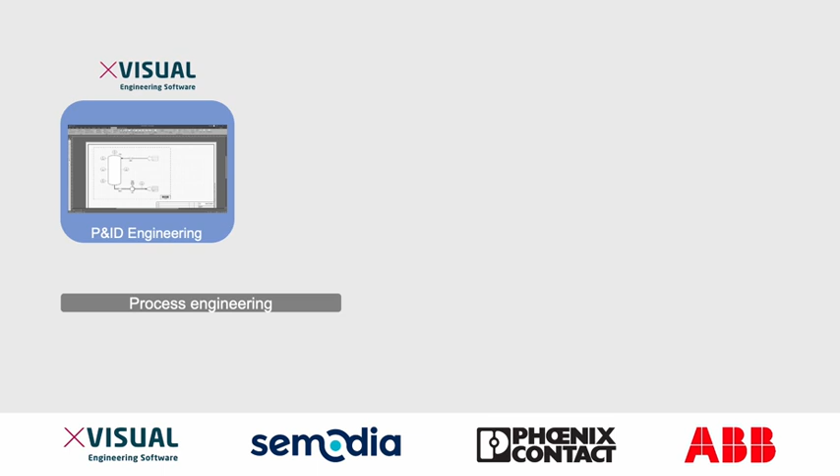The starting point is process engineering, which is handled in Plant Engineer from XVisual. The resulting P&ID serves as the basis for filling an MTP as much as possible from a process engineering standpoint. This MTP already includes a description of the operator display and important individual control functions. In this context, the MTP is exported via MTP Engine from Semodia, which is integrated directly into the P&ID engineering tool Plant Engineer as a software library.

The exported MTP is then imported into the MTP Designer tool from Phoenix Contact as part of module engineering. This provides the basic structures for implementing the automation engineering behavior, which are then fleshed out and specified further. The services are also implemented during this step. The MTP can be re-exported and transferred to the operator from the time at which the structural expansion is completed.

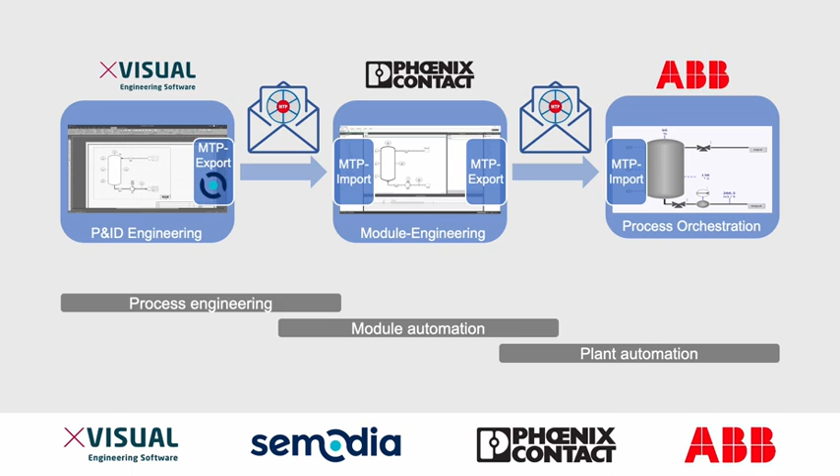This means the operator can already start integrating the MTP, while implementation of the behavior on the control level is completed in parallel. Integration is then completed in process orchestration from ABB, which allows direct controlling of the services and individual control levels. However, the best way to understand all of this is a real-life example, a dosing. Let's start with P&ID engineering.

Thank you very much for your introduction, Henry. Here we see the P&ID for our dosing module. The module has a container, an inlet and outlet with valves, a pump, and relevant sensors to measure various process values. Since the P&ID of a module is prepared in process engineering anyway, it's a good idea to use the P&ID information to create an MTP in order to reduce the workload.

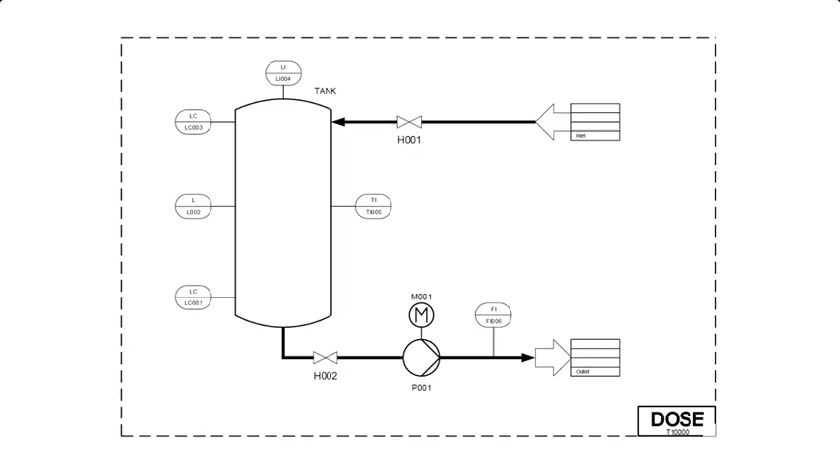Now, I would like to present the process for adjusting the P&ID and MTP export in Plant Engineer in more detail. Plant Engineer is a P&ID software based on Microsoft Visio, with a user interface that integrates seamlessly into the Visio interface. Here, we see the user interface of the software shown with our P&ID module.

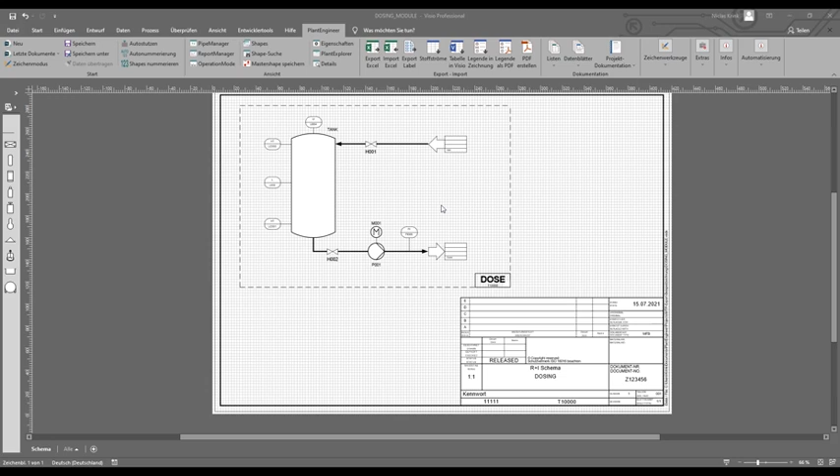However, the P&ID is not just a simple graphic drawing, but rather a representation of a complex informational model that describes the P&ID in the background, and which is supplemented by data that can be used to generate the MTP, for instance. In this module, there is still no sensor for measuring the temperature of the container, so I will now add one and specify it for the export. To do so, I will open the library icon in Plant Engineer and look for the icon I need to display the measurement. I will simply place it on the flow diagram via drag and drop.

Then I will select an intelligent connector tool, which I can use to insert a process connection line between the sensor and container. Next, Plant Engineer opens the Properties window. Here, I can now define the function number of the sensor and specify what kind of a measurement this is. In addition, I can specify whether the sensor should be shown in my MTP here.

First, I use a relevant characteristic to define that the sensor should be displayed visually in the operating screen of my MTP as a visual object. In addition, I assign an eCl@ss number for the sensor, which gives a standardized description of the type of sensor to be displayed. Furthermore, I can use the relevant characteristics to create communication attributes for the sensor so that the measured value can be read out in the POL environment.

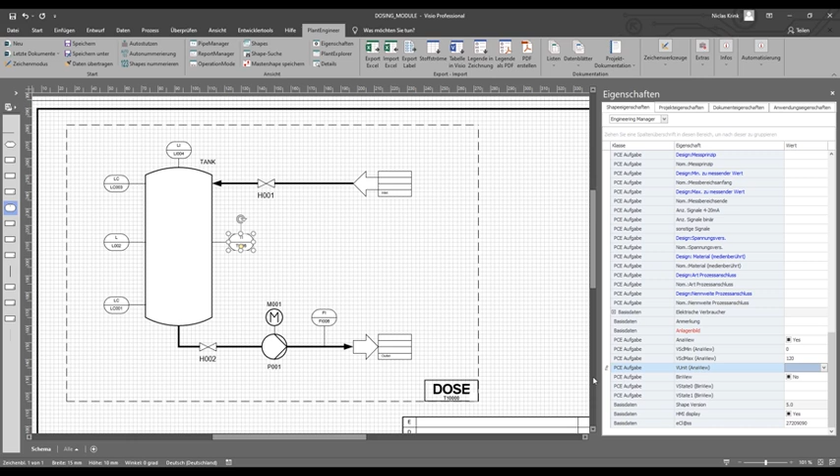In the case of the sensor, I define an ANAView attribute, short for analog view of the temperature. In addition, I define the scaling range, which is between 0 and 120 degrees in this example. This means that for each icon on the P&ID, I can define whether the icon should appear on the MTP operator display, and to what extent it should be able to be measured and controlled by the MTP. The limits of my operator display are defined by the dashed module frame.

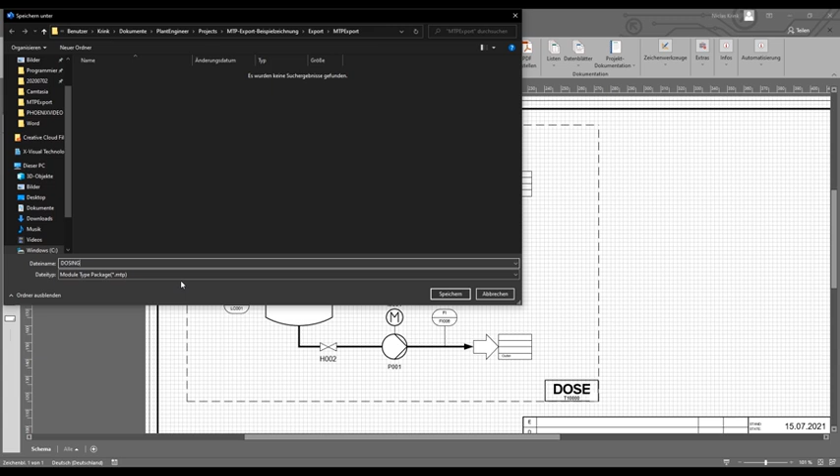I can easily initiate the export of the MTP via the user interface. To do so, I assign it a name, click Save, and the MTP is exported after just a few seconds. The body MTP created this way can now be imported into an environment for the engineering module.

Thank you very much, Niklas. Here we have the MTP Designer, a software tool from Phoenix Contact that is used not only to create and edit MTP files, but also to automatically generate SPS project bodies. Now I will show you how you can implement the module programming simply and cost-effectively. First, the file generated by XVisual is imported into MTP Designer.

The file is supplemented with information specific to Phoenix Contact. To do so, we can now define or adjust the interfaces, which were not yet known at the start of system planning. For example, we can now define a communication interface for the motor. In addition, we can define services and create additional procedures with just a few clicks. I will create a dosing service, for instance.

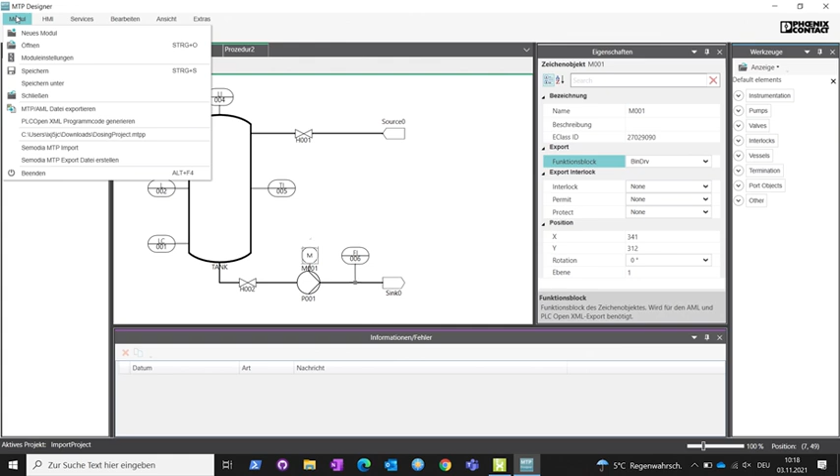An additional procedure is added to this service. Now, the expanded MTP file can be exported. The file is sent to the system engineer and read in by POL. This ensures fast commissioning of the system, since a sequence can already be created while I and the PEA engineer continue to process the SPS program. First, I will export a project body that contains all necessary interfaces.

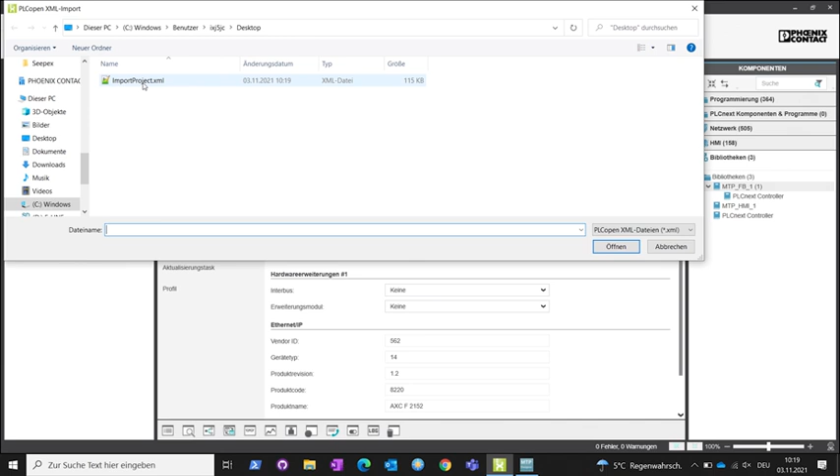Next, I will switch to PLCnext Engineer. This is a software tool from Phoenix Contact that is used to create the SPS projects. So far, I have integrated the libraries here and set the IP address for the SPS. Now, I will import the generated project body. Here, we can see that the appropriate function blocks are created in the SPS program.

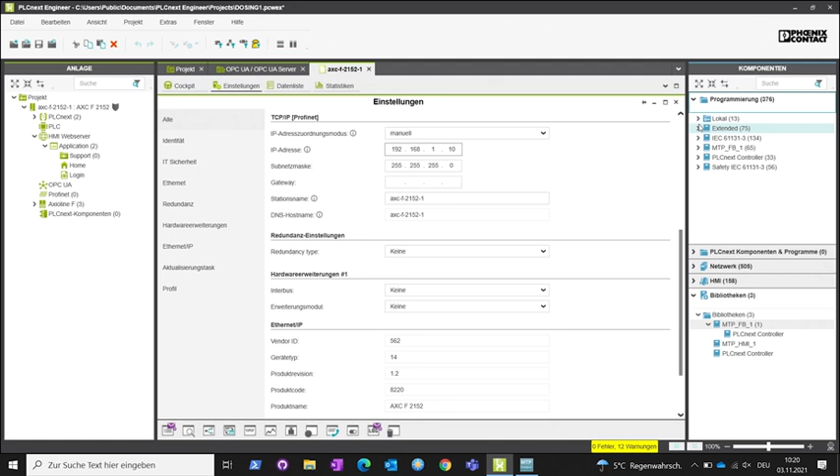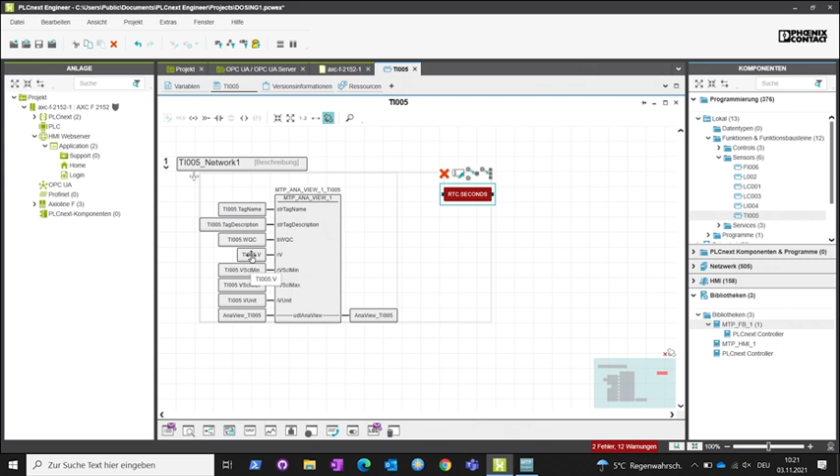The project is already compiled free from errors and can therefore be uploaded to an SPS. However, for an example, I will connect the newly created measurement point TI005 with dynamic data. To do so, I will transfer the seconds from the system time to this measuring point as a value. Then, the project can be uploaded to an SPS.

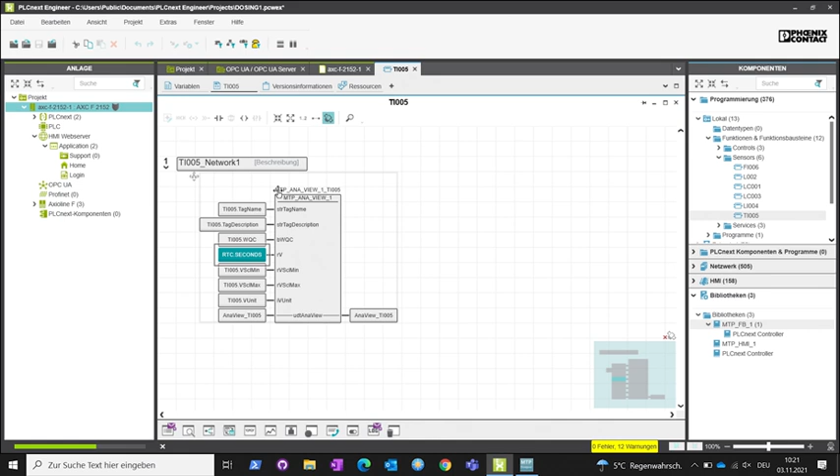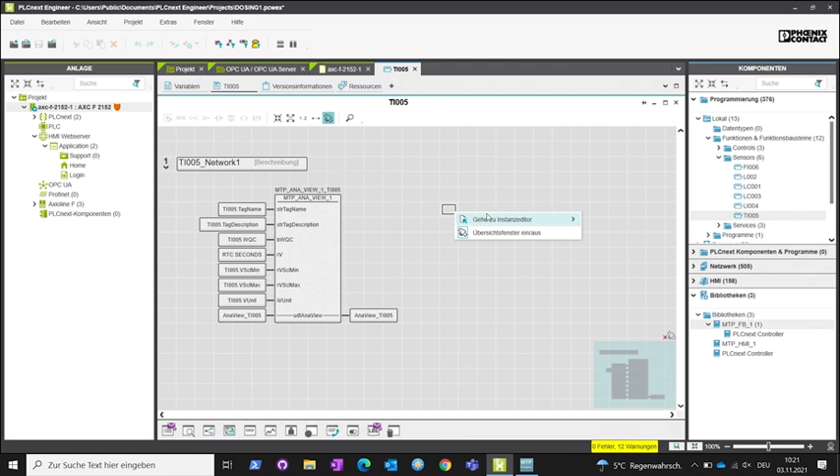Ralph, please show us how simple it is to integrate the module into the system by using the MTP file. Thank you very much for sending the MTP file. Now I can insert it seamlessly into the process automation. To do so, I will first start the ABB Orchestration Designer. I can insert the PEAs here and plan the production process. I could also prepare this work step offline, which is done especially for standardized PEAs.

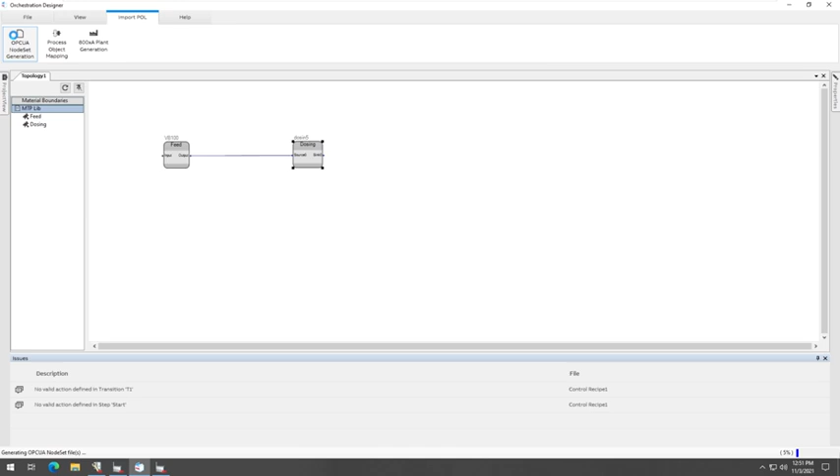In the next step, I need to configure my communication. Then I will apply the configuration to the process orchestration level, POL, and thereby load the graphic images and the recipe.

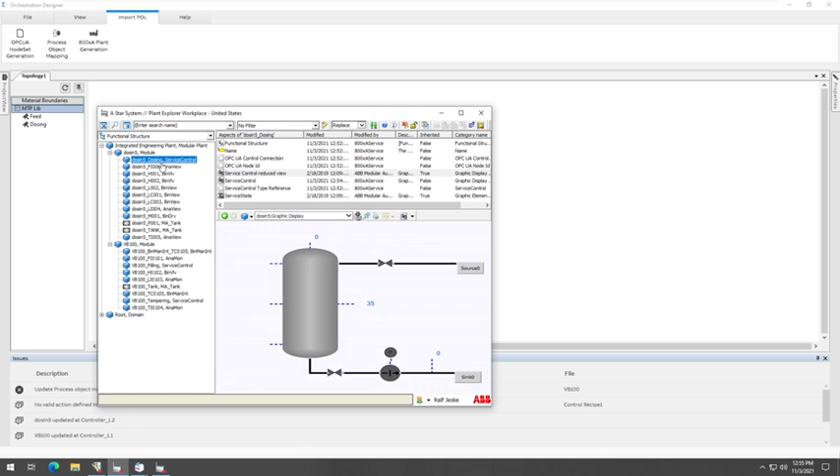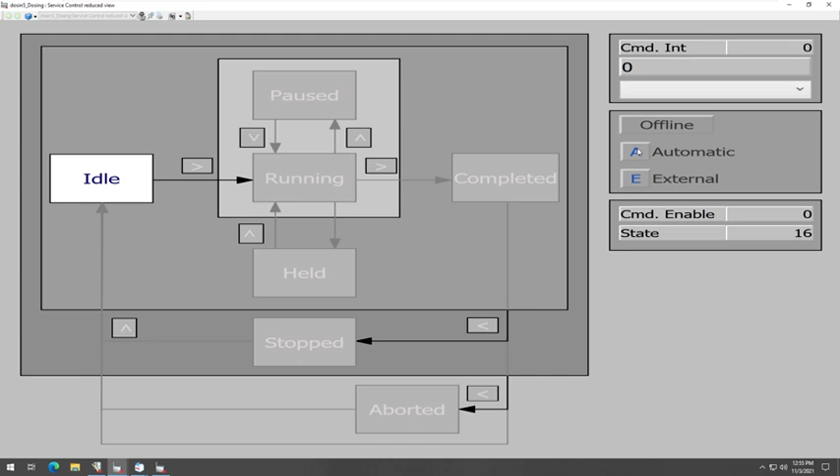We can use ABB's service controls to operate the services. As we do so, we will observe the visualization of the function blocks. Once the operation is working, the PEA can be integrated into the recipe of the orchestration level. As you can see, consistent engineering is already easy to implement with the tools and technologies available today.